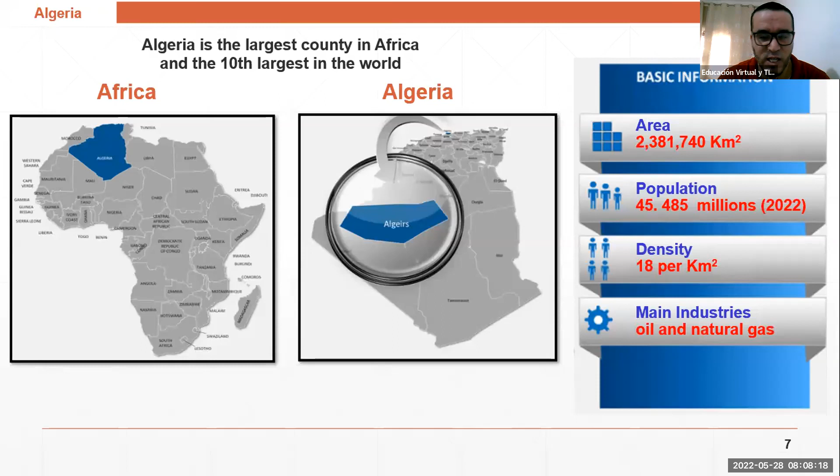Going to the history of Algeria, Algeria is located near Europe and it was frequently invaded for centuries and governed by the Spanish, Turkish, and French. The last one was French from 1830 to 1962. A revolution of nationalist resistance was conducted by the National Liberation Front, leading to independence in 1962.

So this is the flag of Algeria, with two colors, green and white, and we have also the crescent and star, which is a symbol of Islam, the major religion in Algeria. Actually, 70% of people live in the cities along the coast in the north part of Algeria, and the official language is Arabic, and the chief religion is Sunni Muslim. Also, the currency is the Algerian dinar.

So you can find also that Algeria is a very rich country in terms of diversity. Each part has some specific foods, and very famous food like couscous, pasta, chicken, lamb, and vegetables. And you may enjoy the food in Algeria in different places.

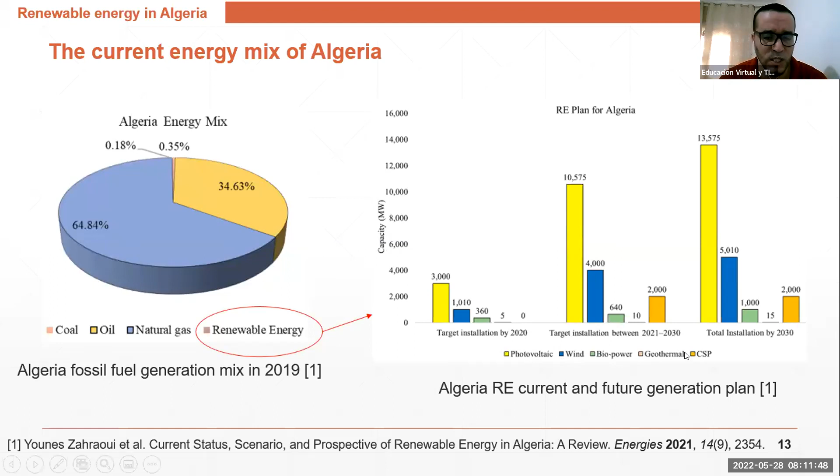So basically, the National Renewable Energy Program target is based on four main points. The first one is the construction of electricity production plants from renewable energy sources. The first objective from the Ministry of Energy Transition and Renewable Energy is to achieve 1,000 megawatts cumulatively per year. That means that at about 2035, we should have like 15,000 megawatts of electricity produced from renewable energy. So this is the plan from the Ministry of Energy Transition and Renewable Energy.

The second point is preparatory work for the launch in 2021 of 1,000 megawatts in photovoltaic solar power plants. This includes mainly the creation of a renewable energy development company, update of prospecting studies for land intended for renewable energy projects, and also identification and removal of constraints like financial, legislative, technical, and administrative constraints that each project may face. So the objective is to reduce these constraints.

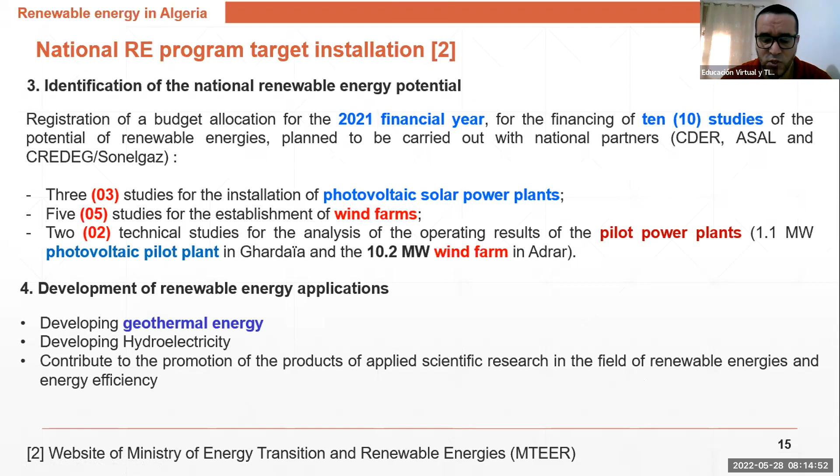So basically now I will move to the different master theses that have been carried out in École Nationale Polytechnique of Constantine, and also University of Guelma, and I will give a summary of them. So the first master thesis that I had the honor to supervise is titled Numerical Simulations of Heat Exchanger in Deep Borehole Drilling in Geothermal System, Application in the Algerian Context. We had 2 students that carried out this master thesis, Marwa Safir and Rania Hamouda, and the objective was to simulate numerically the borehole with different shapes. So we have a conventional U-tube, and also a U-tube with internal fins. And we have another shape, which is a helicoid tube.

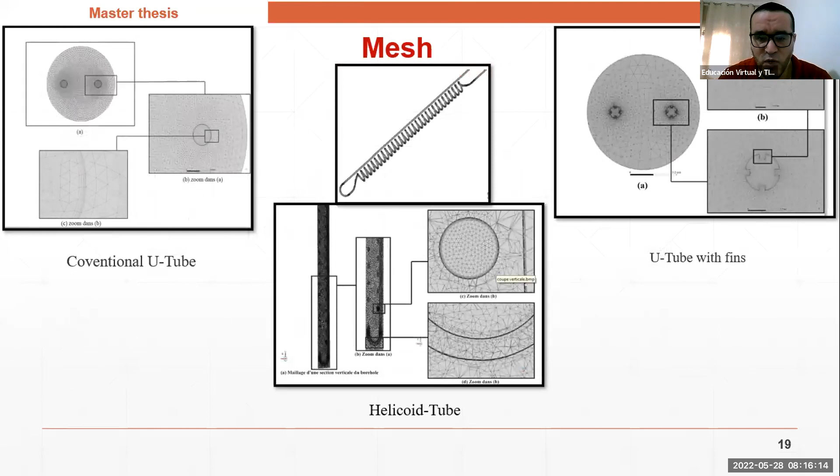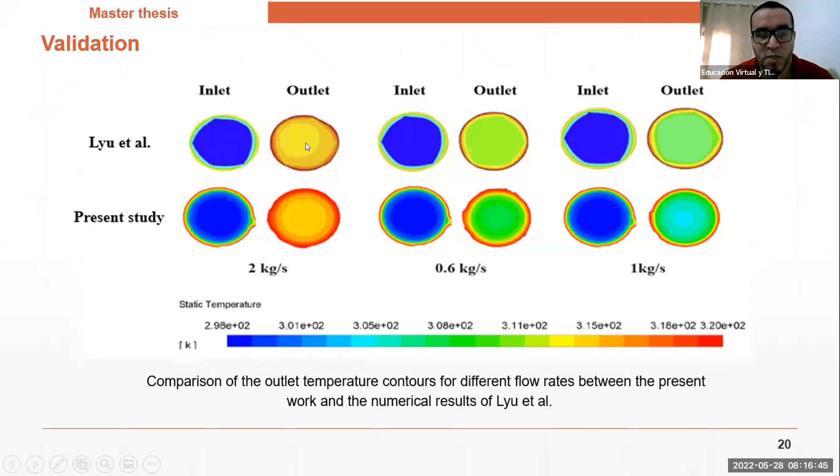So we compare the different geometries to get the best performing one, the one that provides a better heat transfer rate. This is basically the mesh we have used, where we have refined the places where the gradients are important. And we validated and compared our results with previously published data. So in this borehole, basically we have cold water that enters the tube, and from the heat that we get from the geothermal resources, the cold water will get heated, and then we get a higher outlet temperature that can be used in different applications later.

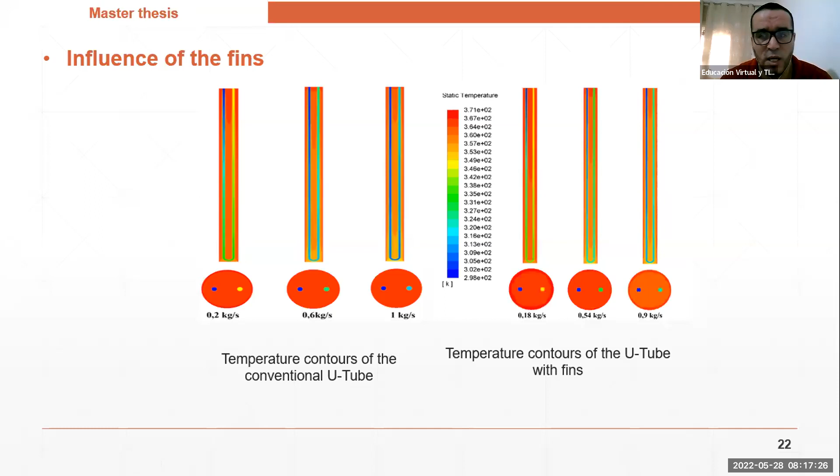So basically these are the results where we compare the different geometries, like the U-tube case and the helicoid tube. And we can see that the temperature is increasing from the inlet to the outlet. We investigated also the comparison between the simple U-tube and the U-tube with fins, and we have seen that including these fins will increase the temperature of the outlet water. Also, we investigated different helicoid geometries by investigating different mass flow rates, and also different steps of the helicoid geometry.

These are the different conclusions we get from this study, where, for example, decreasing the diameter of the helicoid increases the temperature of the water at the outlet. Decreasing also the water mass flow rate at the inlet of the helical tube increases the temperature at the outlet. And we found out that the best performance for the output temperature was for the case of the smallest step of about 0.1 meter. The addition of fins increases also the heat exchange surface area as well as the outlet temperature, and the decrease in water mass flow rate at the inlet of the U-shaped fin tube increases the temperature at the outlet.

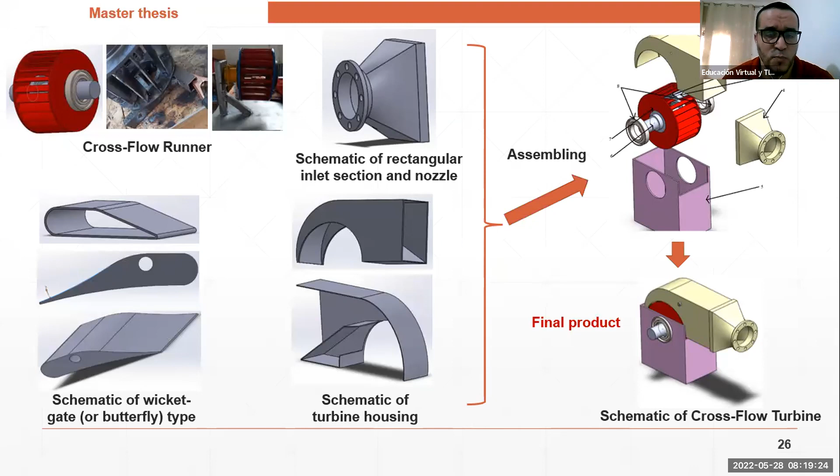So there is another master thesis that has been supervised by our colleague, Dr. Abdelhakim Djebara, and it is about design and sizing of a Banki turbine. Actually, this is the design that has been developed, and also they were able to construct this turbine at the École Polytechnique of Constantine. This turbine basically can be used in superficial water, like shallows. For example, if you have a high shallow, this turbine can be included below the shallow, so it will produce electricity at the end. They did several investigations of different parameters to compute the net height, the torque and efficiency as a function of the turbine speed.

Another thesis entitled Economic Study and Mapping of Algerian Geothermal Potential for Electricity Production, which is supervised by Dr. Hamza Sammari, who will give us a talk later, and maybe he will give us more details about this thesis. I'll give him the opportunity to give us more detail.

We have another thesis supervised by Dr. Soufiane Berkan, who will also present in this panel. The thesis title is Study and Sizing of Geothermal Energy Heating System for Xana Thermal Spring in Buera. So he will be able to give us more details about this later as well.

Also at the École Nationale Polytechnique de Constantine, we did a workshop about ArcGIS software, thanks to our colleague who will also present later, Dr. Fouad Bouisha, who managed to do this workshop. We invited students at different levels and some colleagues who participated, and we really enjoyed this workshop and learned a lot about this software that can be useful for geothermal or other applications as well. You can see here the workshop that took place at the École Nationale Polytechnique de Constantine.

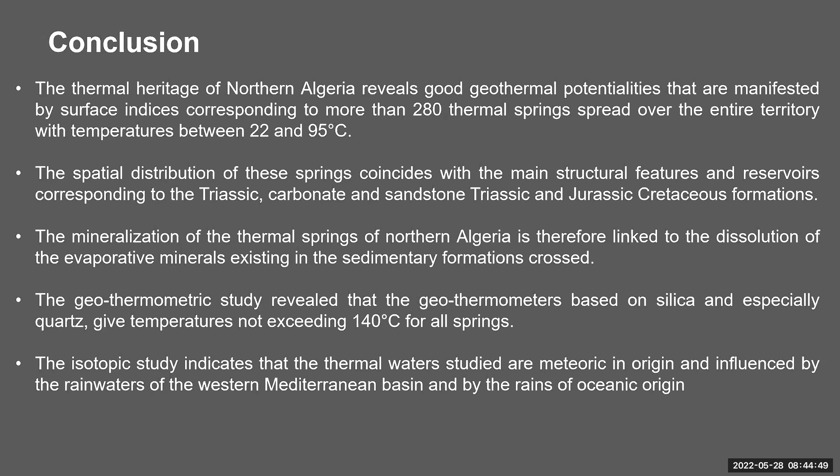To add, I think there was a problem with the... Fouad, can you hear us?

Yeah, I think he has a problem with connection, but we are lucky that maybe he almost finished his presentation, and hello, Fuad, yes. Connection problem, yeah. It's okay, it's okay. I think you almost finished your presentation, right?

Franchement. Okay, thank you. Thank you, Fouad. I think now we can see the screen of Dr. Siham. Okay. So please feel free to start. Okay, thank you. You can hear me, please? Yeah, we can hear you. Okay.

Good morning, everybody, or good evening. My name is Siham Zerrouk, and I am a doctor of geoscience. Actually, I'm working as an engineer at the Geological Survey Agency. Today, I'm going to present an overview of the geological setting and the geochemical characteristics of some Algerian hydrothermal springs. The order of the presentation is as follows. An introduction, the main goals of this presentation. We are going to discuss two main points. The first one is the relationship between geology, especially plate tectonics, and geothermal energy.

In this main point, we are going to talk about the major structures of Algeria, the geochemistry and the geological setting of the thermal waters. Then we are going to discuss some geochemical characteristics of some Algerian sources, and we will finish with a conclusion. So geothermal energy has been used for several purposes since the Paleolithic period. Algeria has a significant geothermal potential linked to its geological diversity. Unfortunately, the actual use of this resource remains very limited in Algeria due to two main problems: the availability of other energy resources and the high cost of exploration methods.

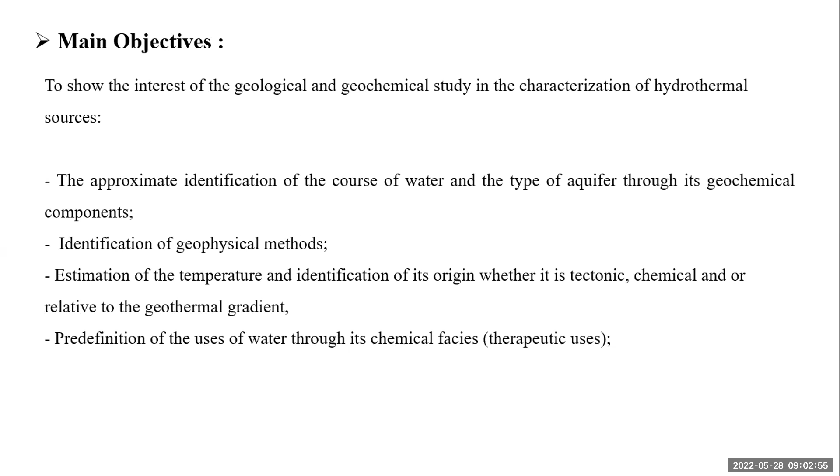And it can identify the geophysical method to use for exploitation, the estimation of temperature and identification of the origin, whether it's tectonic, chemical, or related to the geothermal gradient. Another important point is the prediction of the use of water through its chemical facies. As a definition, geothermal energy is thermal energy generated and stored in the earth. The temperatures at the core-mantle boundary reach over 4,000 degrees Celsius.

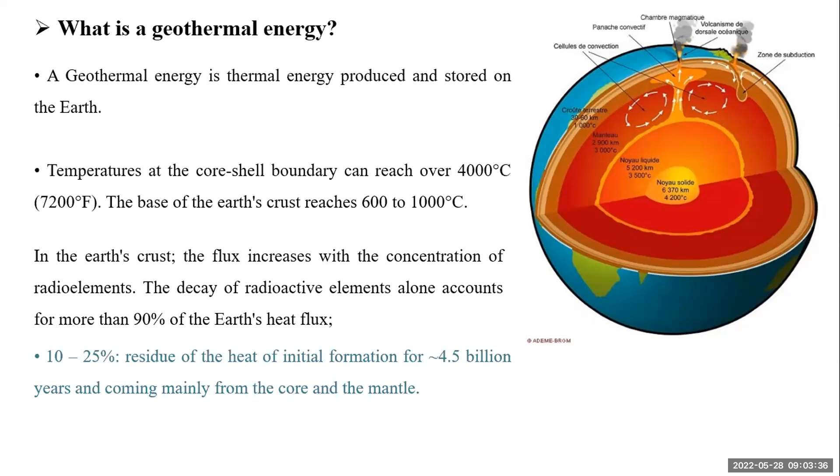In the Earth's crust, the flux increases with the concentration of radioactive elements. The decay of radioactive elements accounts for more than 90% of the heat flux. The 10 to 25% is the residue of heat from the initial formation 4.5 billion years ago, coming mainly from the core and the mantle.

As we can see here, I want to emphasize the first point, which is the relationship between geology and geothermal energy. In this figure, we can see at the upper part of the lithosphere that in general the magma rises at the ocean level along the mid-oceanic ridges, above the subduction zones, like we see here on the right, and the strongly extended areas, and the hot points, which represent the volcanic areas.

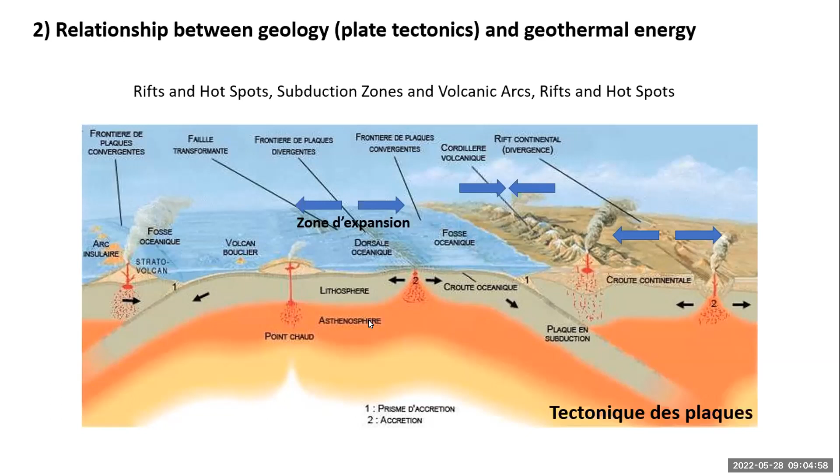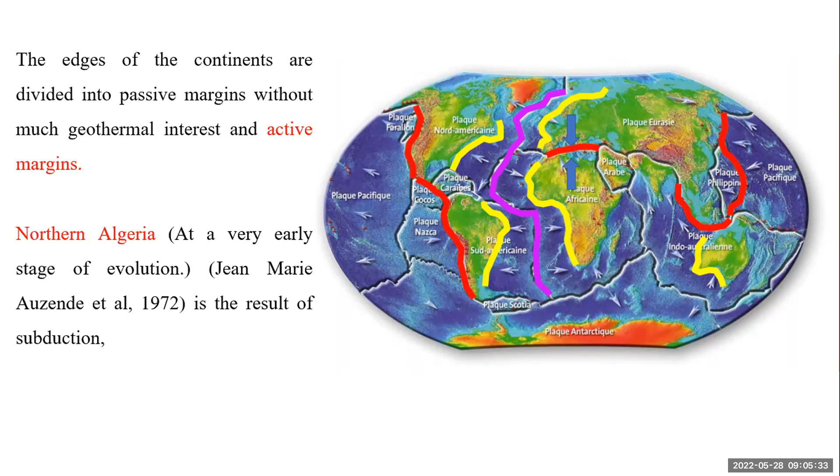So the edges of the continent are divided into the passive margin, without much interest in geothermal energy, and the active margin, with a big interest in geothermal studies, like the northern Algerian boundary, which represents at a very early stage of evolution a result of subduction. So it's very important to make regional studies of the whole Algerian territory.

The second unit is the Atlas domain, represented by the Saharan Atlas and the Tellian Atlas, separated by the high plains, and separated from the Saharan domain by the big South Atlas accident. And we have the northern domain, which we call the Tellian domain, which has been affected by the Alpine orogeny.

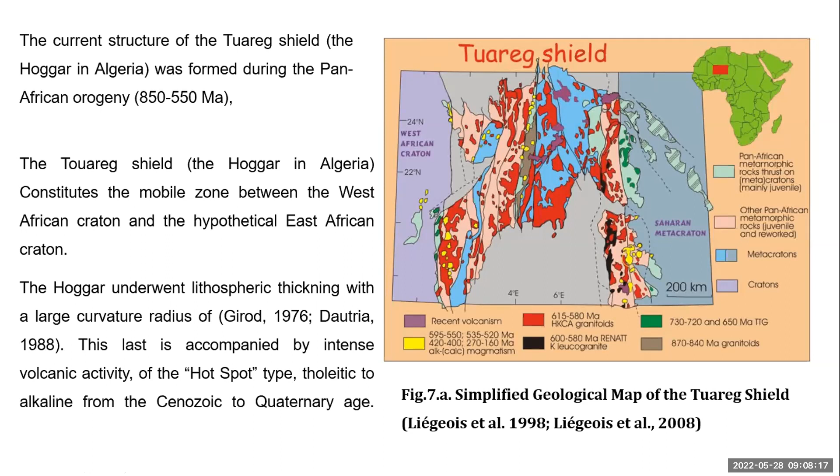which affected this region. If we do a sketch of the Algerian territory from the north to the south, we can see different interesting zones for geothermal investigation, like the northern part, which represents the result of the subduction between the African plate and the Eurasian plate. And also we have the Hoggar Massif, where it is very important to know that there is cratonic bulging in this part of Algeria. So it's very important to do a geothermal investigation.

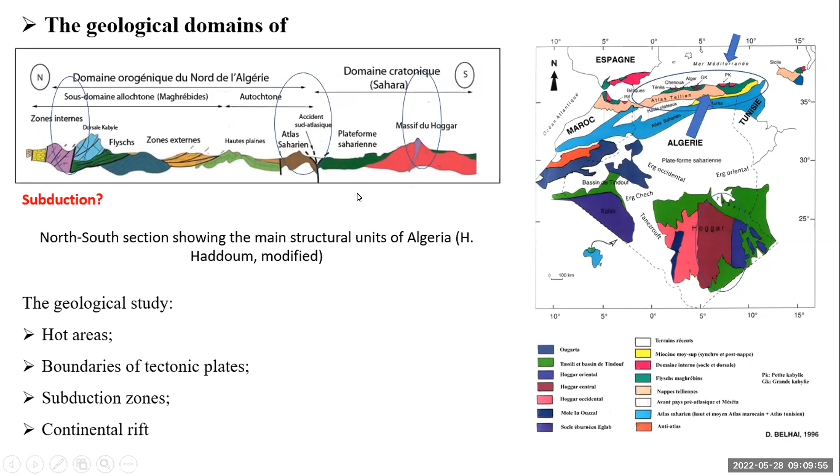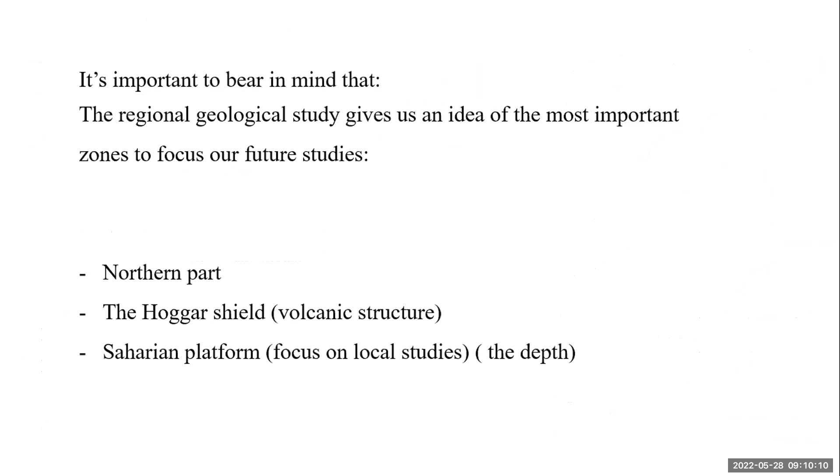And we have this part between the Atlas domain and the Saharan platform. I think that the studies must be made exactly in these areas, because there are lots of hydrothermal sources. So the geological study shows us that there are lots of regions where we can do our studies, like the hot areas, the boundaries of tectonic plates, like the northern part, the subduction zones, and continental rifting, like the Hoggar. So it's important to bear in mind that the regional geological study gives us an idea of the most important zones to focus our future studies, like the northern part, the Hoggar Shield, and the Saharan platform.

The second point I want to emphasize is the geochemistry of thermal water and its relation to the geological setting. The cations and generally the geochemical indicators can give us a lot of information. We are going to quote some examples, like the dissolved gases. For example, dissolved oxygen. A high dissolved oxygen content is typical of water that has had little contact with organic matter or sulfide minerals.

The second one is methane and hydrogen sulfide. We can see that nitrite and sulfide suggest the possibility of human influence in the composition of water. It's very important in this case to do a geochemical analysis of these two elements to see if there is eventual pollution.

The third very important element is the helium concentration. It has been observed that there is a close correlation between helium level and proximity to hot springs in several locations. The effect was attributed to the escape of helium from the hot water into the local soil gases.

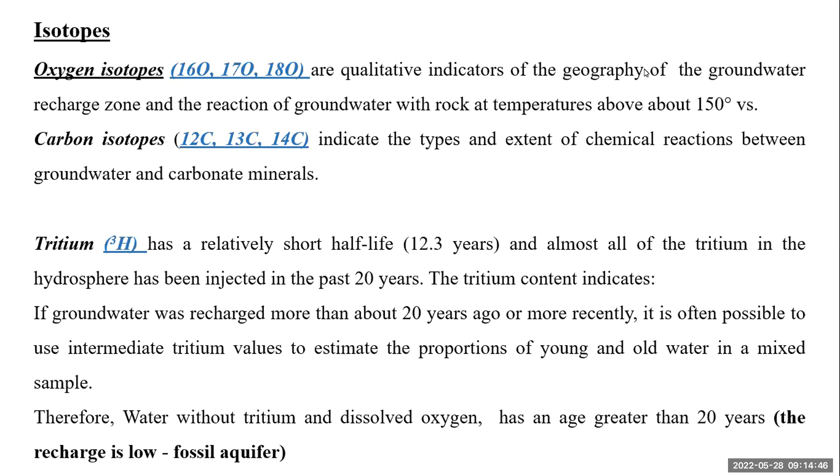Therefore, water without tritium and dissolved oxygen has an age greater than 20 years. The recharge is low, so we can call the aquifer a fossil aquifer. The isotopic ratio of groundwater oxygen can be modified by chemical and isotopic exchange reactions between water and aquifer rock. Because the O18 value of rock-forming minerals is strongly positive, reactions between water and rock will make the O18 value of water more positive.

Such reactions occur only very slowly below 150 to 200 degrees Celsius. Thus, an abnormally positive value of O18 may indicate that groundwater has been exposed to high temperature. This is very important information.

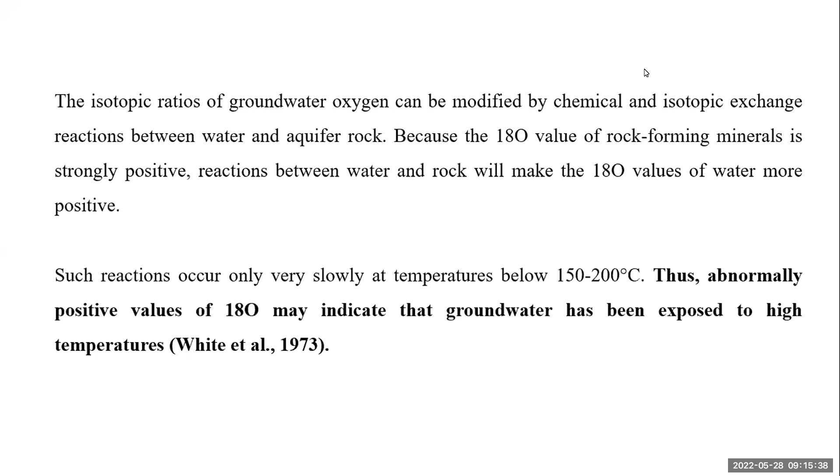Here we are going to talk about the origin of temperature in the different provinces of Algeria. For example, in the Saharan platform, the thermality is linked to the geothermal gradient. In the Saharan Atlas, especially in the eastern parts of Algeria, it is generally linked to the anticlines and synclines present in this region. In the Tellian domain it is the result of the subduction zones, and in general, the springs outcrop at the level of the north-northeast faults. So it's very important to do structural mapping before anything else.

In the Hoggar, the temperature is generally linked to the Cenozoic volcanism and the high basement. I want to emphasize that in the Hoggar there is a lack of water, and generally the aquifers are represented just by shallow water tables, and their temperature is linked to the Cenozoic volcanism. The example I want to talk about is the example of springs in the Hoggar.

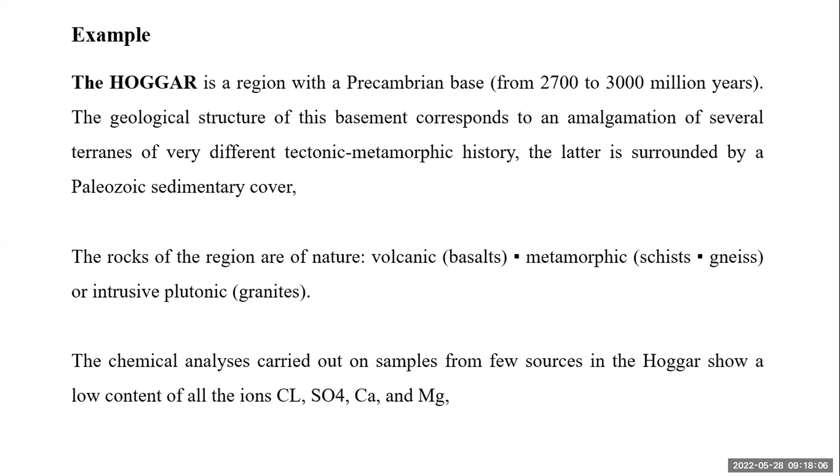Chemical analyses carried out on samples from a few springs in the Hoggar show a low content of all ions like sulfate, calcium, and magnesium. This is because of the crystalline nature of the rocks in the region, and the relatively brief residence of water inside shallow reservoirs also explains the low level of all those elements.

The relatively significant concentration of HCO3 is related to the release of CO2 gas linked to manifestations of Cenozoic volcanism. In this case, for example, we know that there was volcanic activity in the area. So it's important to do the HCO3 analysis.

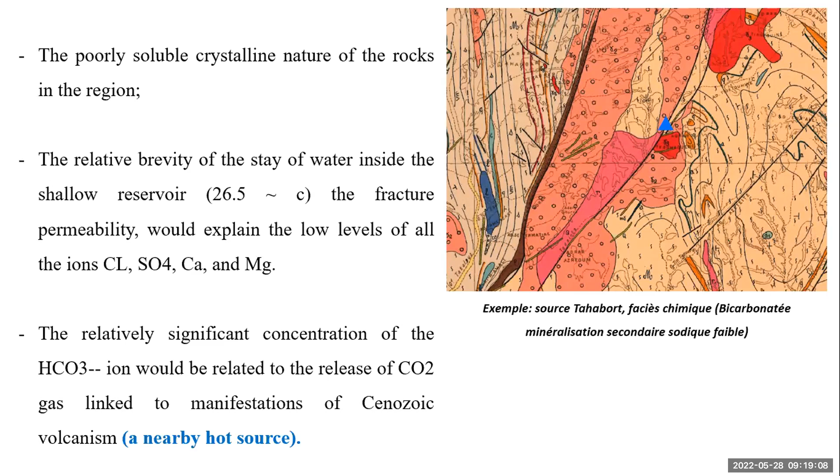The second group represents the medium to strongly mineralized water. It is characterized by a piezometric level which is very close to the surface and promotes evaporation. It is also close to the natural outlet, the chott or sebkha.

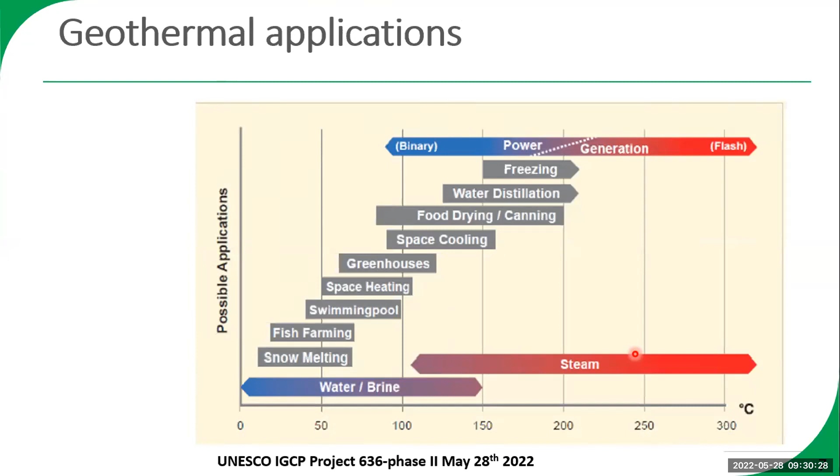Based on temperature levels, geothermal energy can cover several applications as resumed in the present modified Lindal diagram. And when taking into account the available Algerian data, we can say that suitable applications are those requiring a temperature of less than 100 degrees Celsius.

In this context, we remark that even electricity can be produced, since we are still at the lower limit of the power production area. However, this requires choosing the right power plant technology.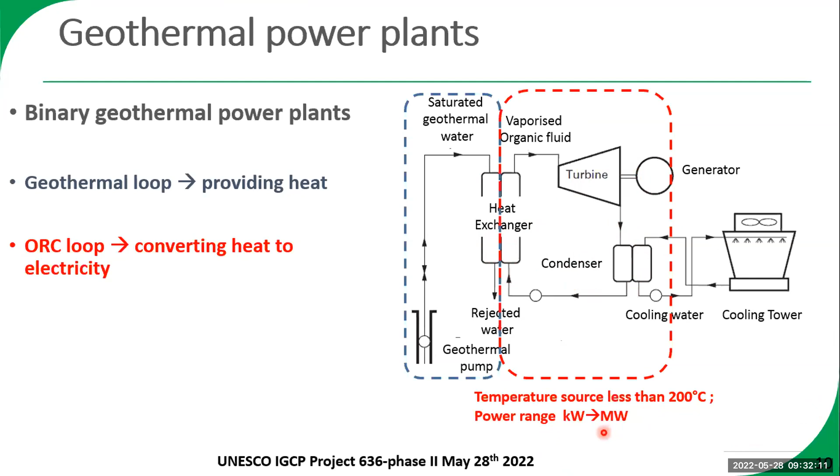Such technology operates under moderate to low temperature levels, generally less than 200 degrees Celsius, and such power plants can deliver capacities ranging from kilowatt to megawatt output. As the Algerian geothermal resources are characterized by temperature levels lower than 100 degrees Celsius, the binary and especially ORC power plants seem to be the most adapted technology for electricity production.

Consequently, we decided to investigate the feasibility of the ORC system to produce electricity for the case of Chellala thermal resort, or Hammam Chellala. Our selection of this site was mainly based on its highest temperature of about 100 degrees Celsius. The thermal resort presents also an interesting proximity of both production and energy demand. That means that no additional investment will be required for electricity transportation. In addition, thermal resorts are very suitable for geothermal applications, such as heating, cooling, as well as electricity production.

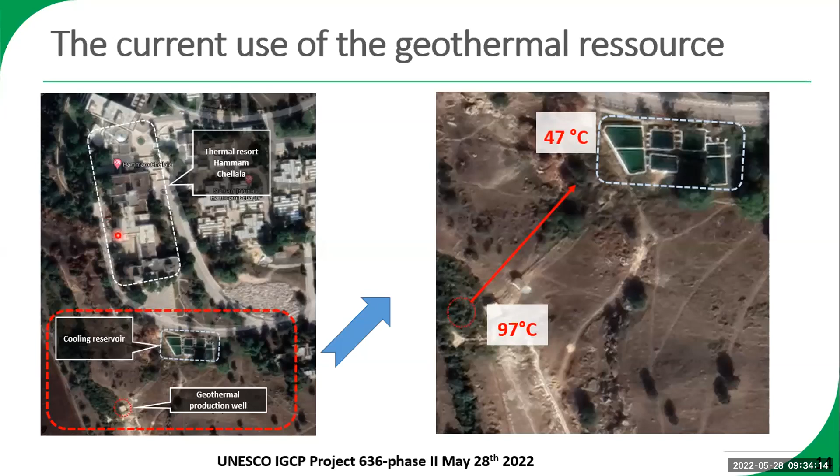The previous cooling process resumed here points out clearly the wasted heat energy that can be recovered advantageously to produce electricity. And this can be made possible by integrating the ORC system as depicted now.

The idea here is to exploit firstly the ORC system to produce electricity before sending the geothermal cooled water at 47 degrees Celsius towards the thermal resort, with the constraint that we have to respect the temperature of 47 degrees Celsius, to avoid any disturbance of the operating mode of the thermal spa or the hammam. In this way, an electric output power of 250 kilowatt was obtained.

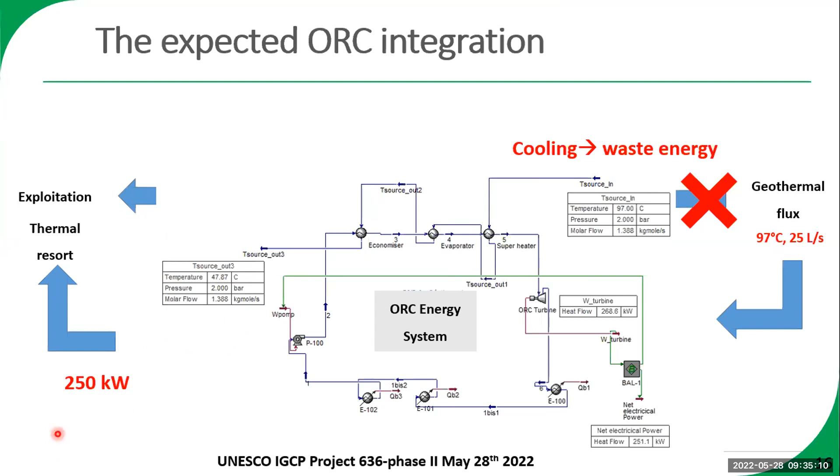After that, in order to ensure a good integration of the ORC system, we carried out an energy audit for the thermal resort of Chellala. The aim was to address its energy demand profile and point out recommendations to ensure that the integration of the ORC system will be performant in good conditions.

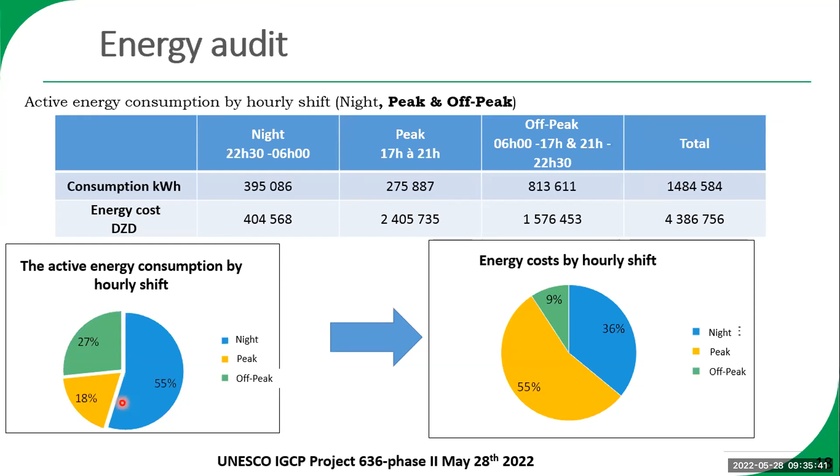The first recommendation was to shift the consumption from peak to night or off-peak hours, with a substantial saving of $900 per year. And here I just underline that such action is an energy management measure and doesn't require any investment.

Later on, the analysis of the energy demand profile highlights that the subscribed maximum available power of 650 kilowatt can be reduced to a value of 500 kilowatt, since the maximum absorbed power identified here doesn't exceed 490 kilowatt.

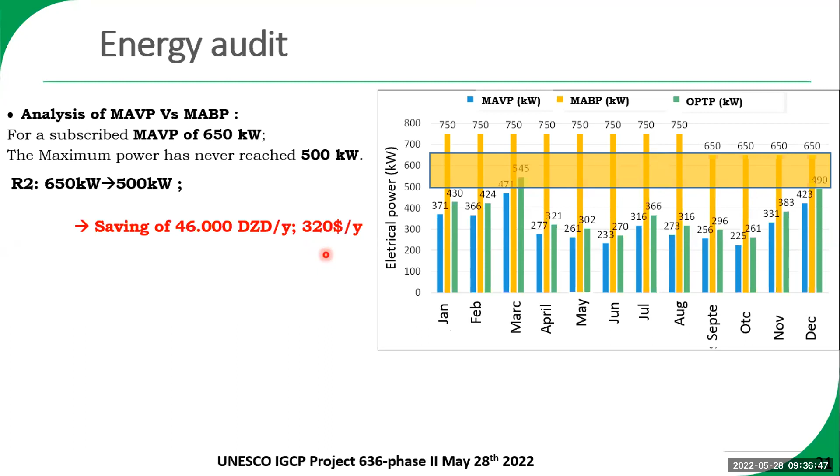Consequently, the second tip recommends the reduction of the maximum available power, with a direct energy saving of about $320 per year. In the same way, such a measure doesn't require any investment, since it's considered an energy management action. And finally, the ORC system was expected, as the third measure, to allow the reduction by half of the dependency of Hammam Chellala, or the thermal resort, in terms of maximum available power towards the national

electricity grid. In fact, the ORC system allows an additional reduction of about $530 per year. And contrary to measures 1 and 2, the ORC system is a heavy investment measure, and the profitability of its integration should be investigated.

Now we can summarize the combination of the three previous solutions. It will lead to an annual energy bill reduction of about $1,700 per year, which represents 4% of the annual bill. This small reduction is mainly due to the heavily subsidized price of electricity. Normally we would get more than 4%.

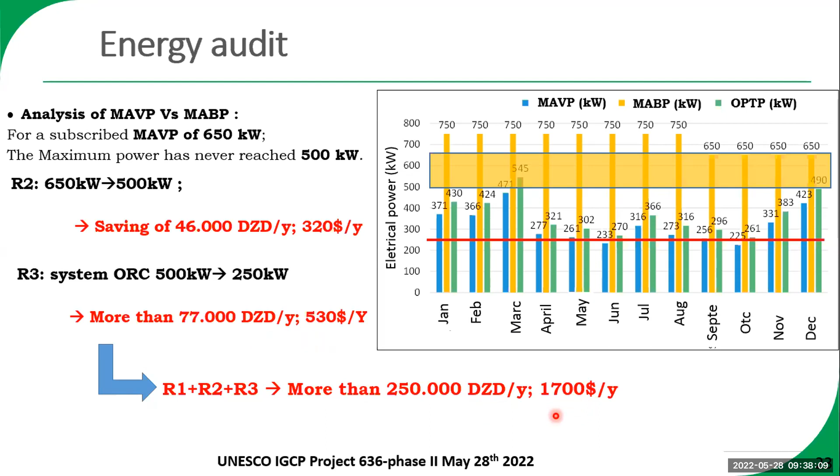Additionally, we tried to investigate the profitability of the ORC system integration presented as the third measure, and obtained results based on a subsidized electricity price of 4 Algerian dinars per kilowatt hour, which corresponds to $0.03 per kilowatt hour. This leads to a payback period of more than 28 years. That means the system will not be profitable at all within the Algerian context.

However, we did a sensitivity analysis varying the price of electricity, and profitability becomes interesting when the subsidies are removed: a payback period of 7 years was obtained when considering a production price of 16 Algerian dinars. This price corresponds in reality to the levelized cost of electricity, and it gives an interesting payback period of 7 years.

The key finding here is that the subsidies on electricity prices must be removed partially or even totally to make such integration interesting from the economic point of view. Otherwise, the Algerian policy or strategy with regard to energy transition will fail.

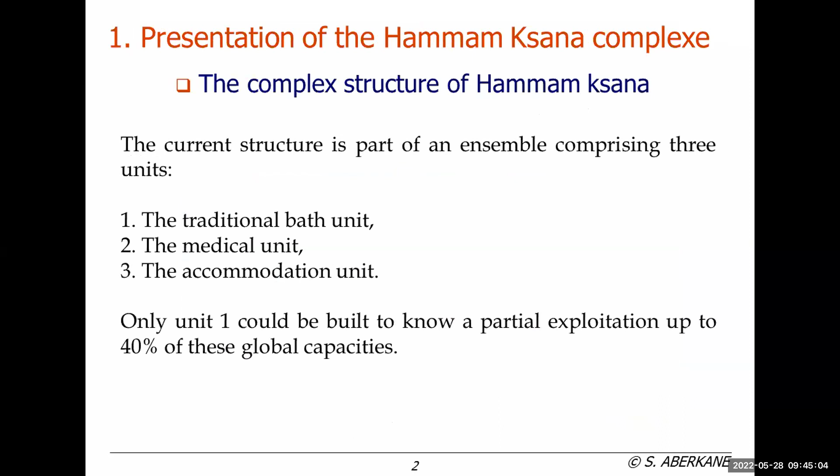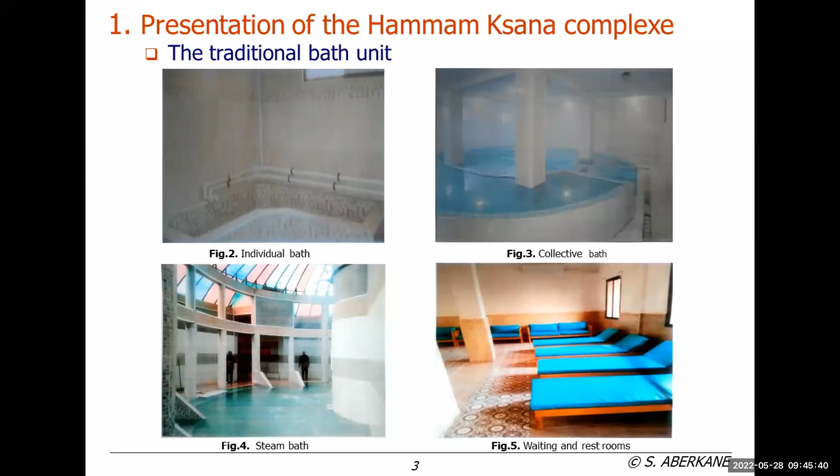Figure 2: we have 60 individual bathrooms, 2 separate collective baths for men and women with a capacity of 50 people each. Figure 4: we have a steam bath with a capacity of 30 people, and waiting and restrooms for taking baths. It also includes a new accommodation, which is not yet operational and is the subject of our study. We try to size heating systems.

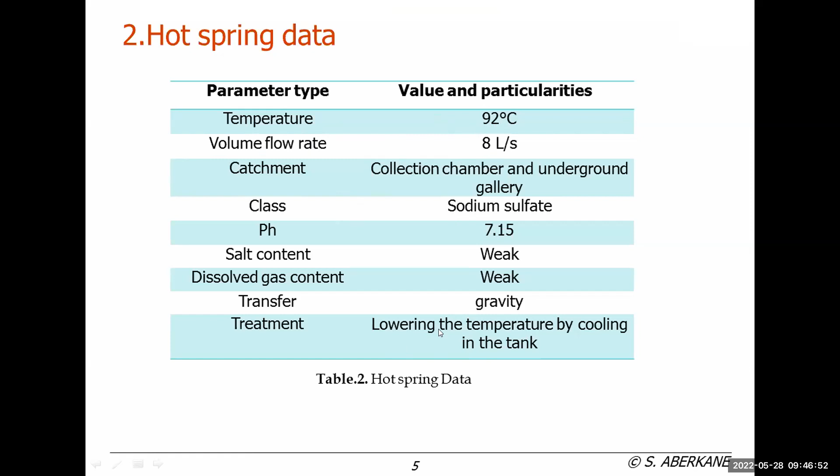The accommodation is composed of 2 suites and 20 studios. It also contains a cafeteria, restaurants with 60 seats, an outdoor rest area, relaxation terrace, and children area. The following table contains the data and particularities of the hot spring. The temperature at the emergence is equal to 92 degrees Celsius. Volume flow rate is equal to 8 liters per second. The chemical facies is sodium sulfate with a pH equal to 7.15.

The transfer is done by gravity between the spring and bath. As you can see in figure 10, it is an artificial geothermal spring. Due to the long distance separating the complex and the hot springs, a 40 meters long channel was dug throughout the mountains to transport the hot water. And since the location of the complex is low compared to the spring, it only depends on gravity to transport it to the bath without using pumps.

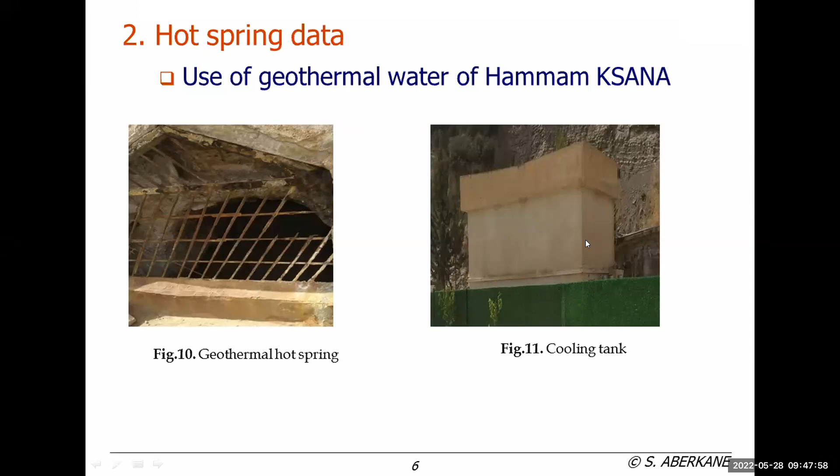Then the hot water is transferred to the cooling tank shown in figure 11. The cooling tank reduces the water temperature from 92 degrees Celsius to 60 degrees Celsius for use in hot baths. The dimensions of this tank are 6 meter length, 4 meter width, and 3 meter height. The objectives of this work: firstly, the estimation of the heating demand of the new accommodations, and the sizing of the heating system using a coil exchanger immersed in the cooling tank.

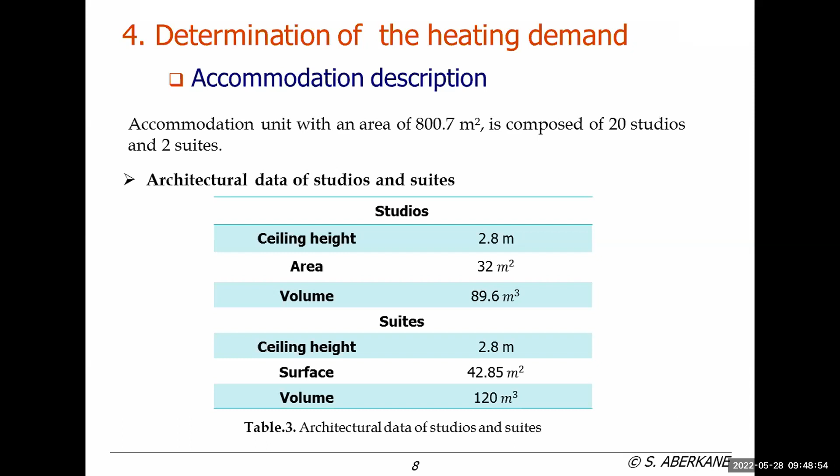The accommodation unit has an area of 800.7 square meters. It's composed of 20 studios and 2 suites. This table represents architectural data of studios and suites. The living area of the studio is 32 square meters, and for the suites is 42.85 square meters. This is for the description of the accommodation.

To calculate the heat losses, this calculation is based on the Algerian building thermal regulations, document technique réglementaire DTR C3.2. These losses are calculated according to the material used in the construction of the accommodation, and also depend on its location. The total heat losses from the heated living space to the outside are calculated using equation 1. DT is the heat losses by transmission through opaque walls, like floor, exterior walls, ceiling, and glazed walls like windows, and the thermal bridges, which for the whole building can be evaluated at 20% of the losses by transmission.

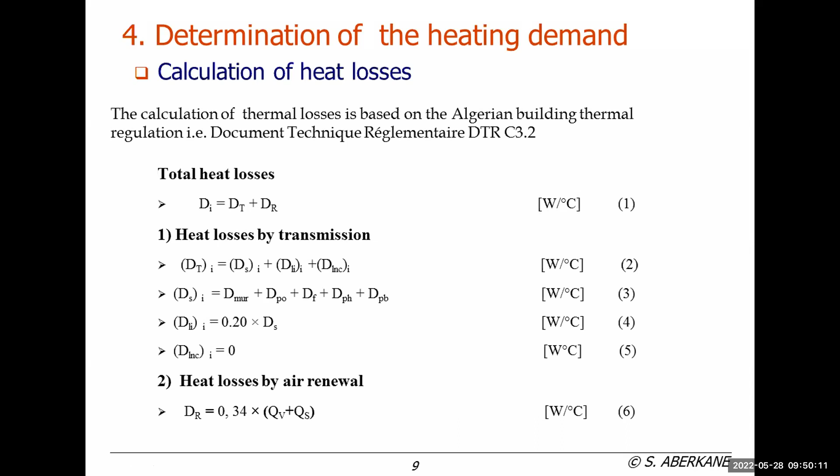For estimation of heating power, we take into account the heat gain brought by the lower floor of the bath maintained at 40 degrees Celsius. So the power necessary for heating the rooms will be reduced to approximately 41 kilowatts, which will be covered by the available power supplied by the hot water. This available power, around 1 megawatt, exceeds our needs, and was calculated with respect to the temperature of 60 degrees Celsius so as not to affect and disturb the operation of the hammam.

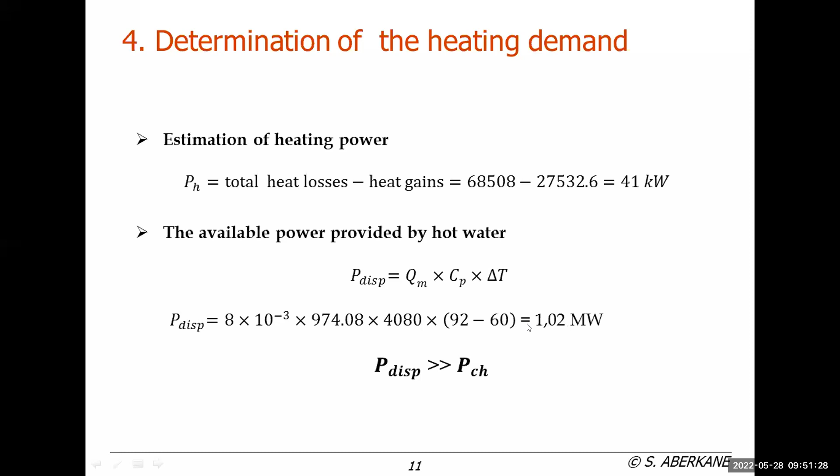So many processes involve the exchange of thermal energy, and as such require at least one equipment capable of transferring heat between two or more fluids at different temperatures. These equipments are commonly called heat exchangers. So the general principle of a heat exchanger consists in circulating the fluids through a wall which puts them in thermal contact, and the heat is exchanged by conduction and convection.

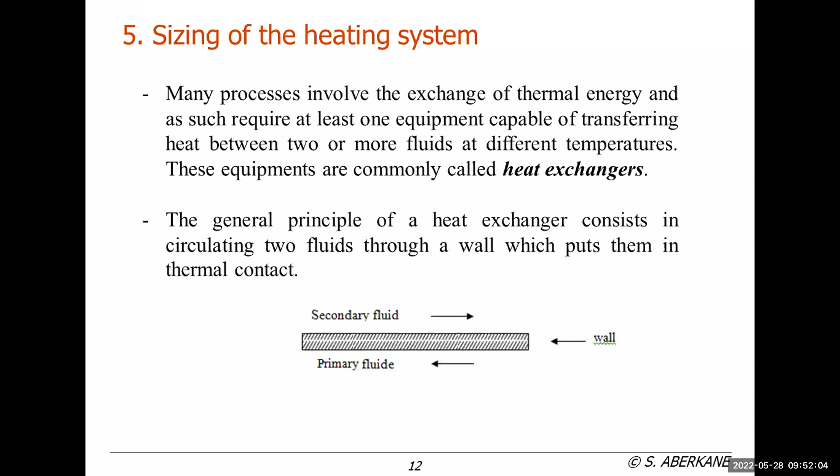So in industry, there are several types of heat exchanger, such as coil heat exchanger, plate heat exchanger, double tube heat exchanger, and shell and tube heat exchanger. Our choice is focused on the coil exchanger, which will be immersed in the geothermal water collection tank. The choice of this configuration comes down to its compact structure, its ease of implementation compared to a shell and tube heat exchanger, as well as its reduced maintenance costs.

For the characteristics of the helical tube or coil tube, we consider an internal diameter of 50 centimeters, thickness of the tube 4 millimeters, and the thermal conductivity of the copper tube equal to 390 watts per meter degree Celsius.

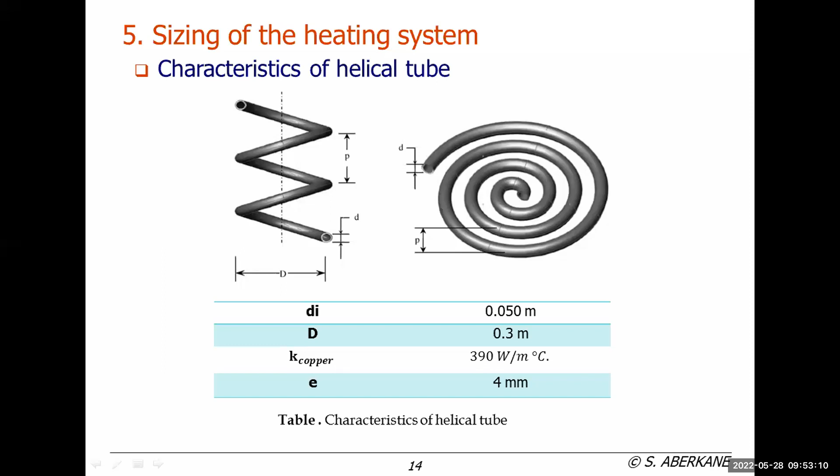So here we present the thermal analysis of the heat exchanger. We have already estimated the power of the heating by the DTR C3.2, which is equal to 41 kilowatts. The purpose here is to calculate the exchanger area A. For that, firstly, we calculate the logarithmic mean temperature difference, which depends on the temperature of the two fluids at the inlet and the outlet of the heat exchanger.

Then we determine the thermophysical properties of the two fluids. After, we calculate the overall heat transfer coefficient, depending on the convection coefficients in the inner and outer tube, hi and ho. Finally, we calculate the exchange area, and after that we determine the length, the pitch, and the number of turns of the coil.

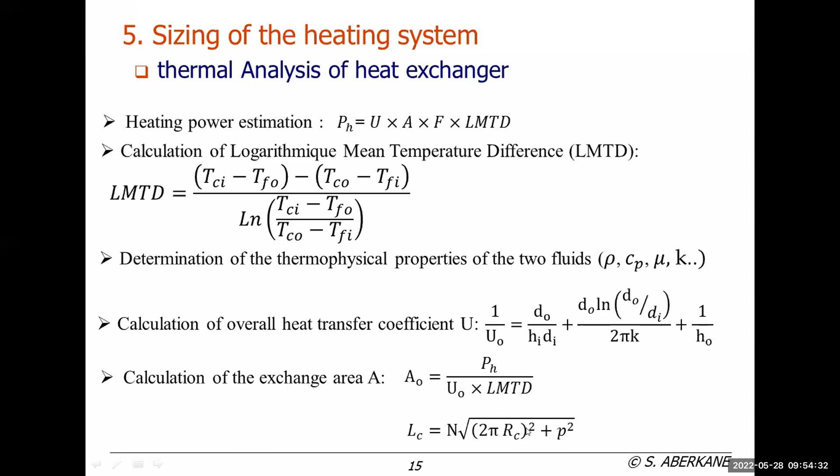The radiators transfer heat from the hot water to the ambient air of the room where they are installed. A radiator model 800/80 made of aluminum alloy is chosen. A temperature regime of 65/50 is considered: 65 degrees Celsius is the temperature at the inlet of the radiator, and 50 degrees Celsius is the temperature at the outlet of the radiator.

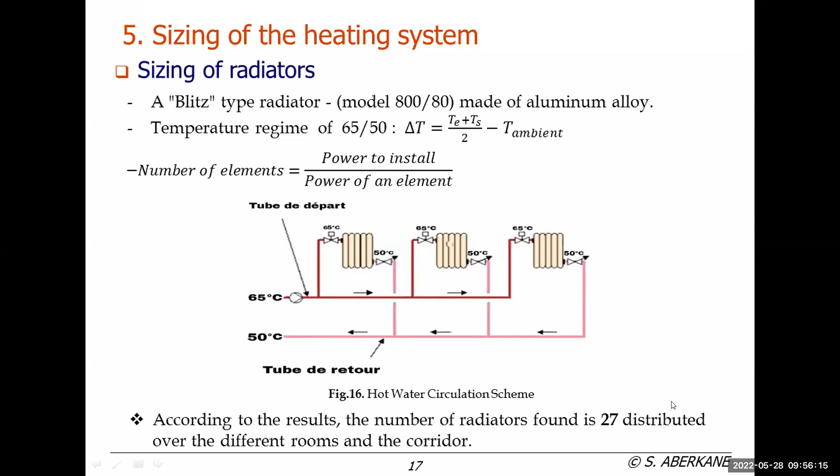So the number of elements is calculated by dividing the heating power by the power of one element, which is determined from the technical data according to the delta T and the model chosen. According to the results, the number of radiators is 27, distributed over the different rooms and the corridor.

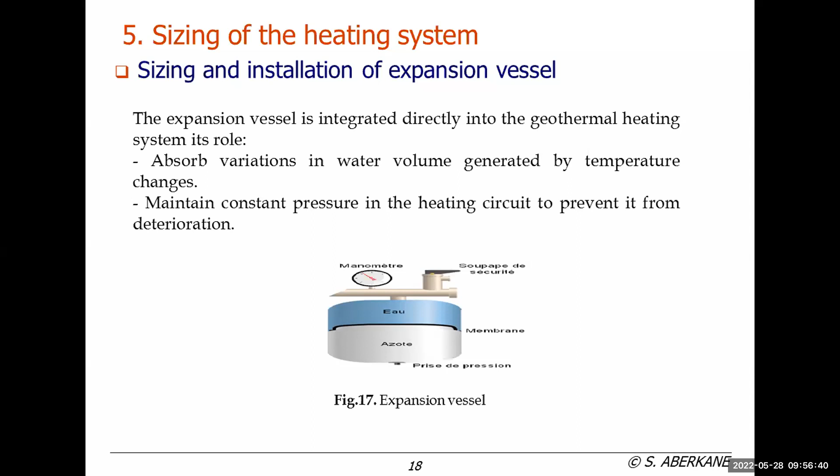The expansion vessel is integrated directly into the geothermal heating system. Its role is to absorb the variation in water volume generated by the temperature change and maintain constant pressure in the heating circuit to prevent its deterioration. To size the expansion vessel, we first calculate the initial inflation pressure of the vessel to counter the static height of the building and ensure sufficient pressure at any point of the circuit. H here is the height between the location of the vessel and the highest point of our installation, which is estimated at 5 meters.

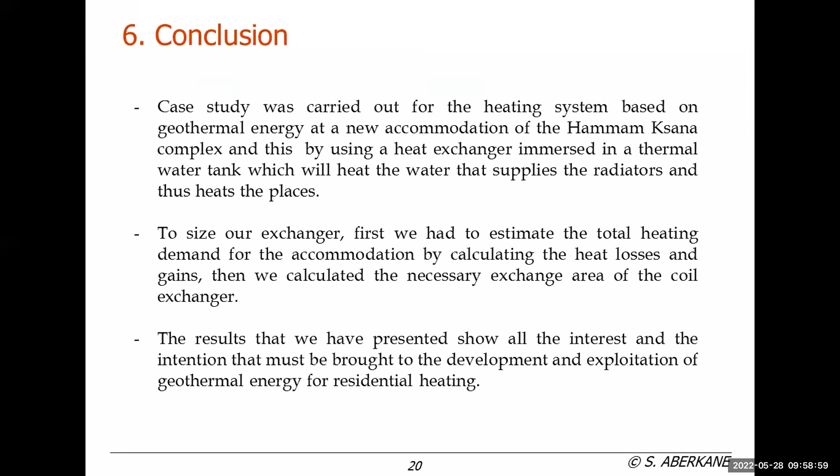The results that we have presented show all the interest and attention that must be brought to the development and exploitation of geothermal energy for residential heating. Our perspectives for the next work: the optimization of the heating system put in place by sizing the pipes and the circulator, which allow the proper operation of the circuit, and a technical and economic study of the proposed heating systems. This year we have two students working on this economic study.

Also, we can integrate a parallel ORC system for the production of electricity and exploitation of hot water after its use in the bath for the heating of greenhouse. So the exit temperature of water after use is approximately 40 degrees Celsius.

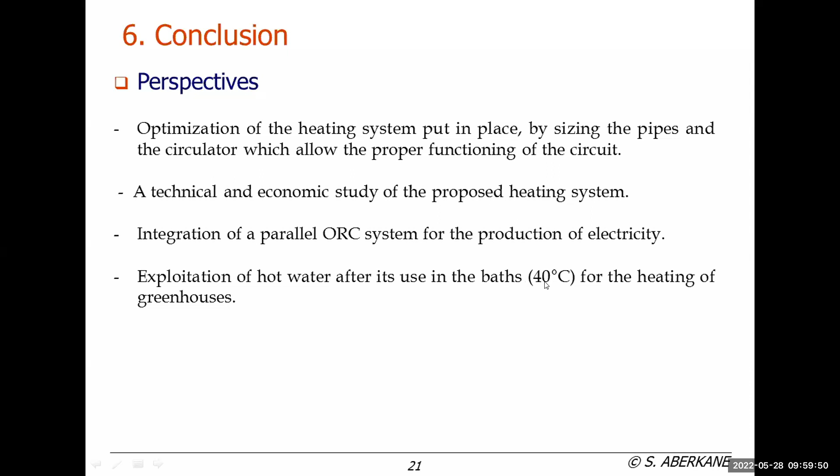Thank you, Dr. Sofiane, for the nice presentation. It was really nice to see the sizing of heat exchanger and the application with the geothermal sources. And again, if anyone has a question to Dr. Sofiane, please feel free to participate.

We do have a question from Daniela. She said, thank you, Sofiane. The two temperatures you considered to estimate the available thermal power, 90 and 60 degrees Celsius, how did you define them? 90 is the hot spring water temperature, and 60 is what? She is asking about these two temperatures, how you define them.

Yes, thank you, Daniela. So the 90 degrees Celsius is the temperature of the hot spring at emergence. It's measured. And the 60 degrees Celsius is the temperature used in the bath. So the tank is used only for cooling this water from 90 to 60 degrees Celsius. So by using the heat exchanger, we try to recuperate this energy to convert it to heat the accommodation.